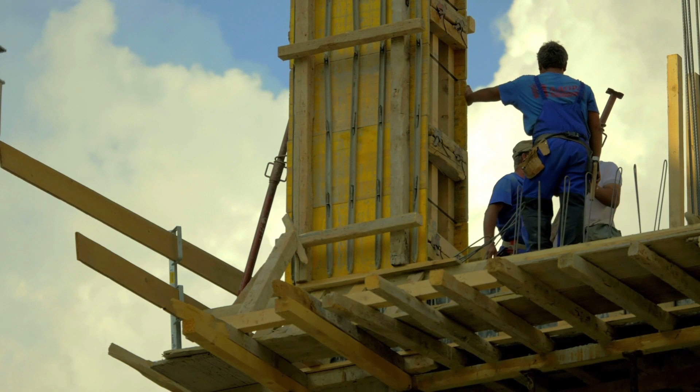As I am from the civil engineering field, I am going to elaborate here about civil engineering subjects at the beginning. Among the many subjects of civil engineering, I have first chosen to explain building materials. In this subject, you are going to know about the principal properties of building materials. This is episode number 1 of building materials, covering principal properties of building materials. Let's start without wasting much time. Building materials.

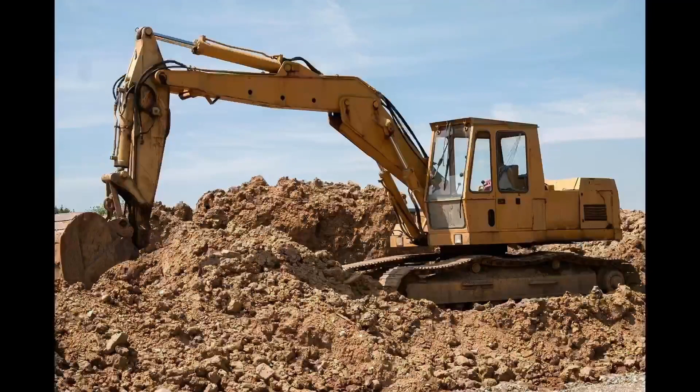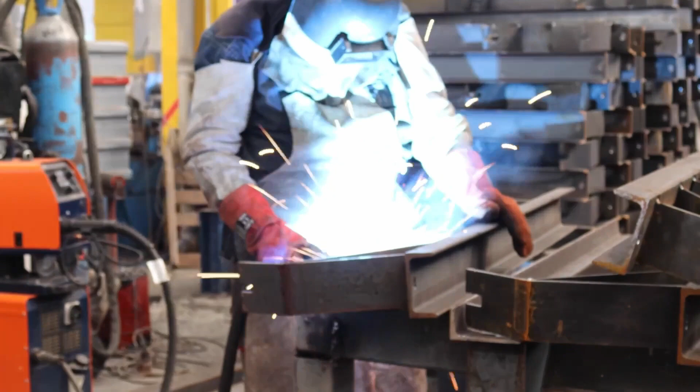As we know, construction materials play a very important role in this modern era. Although the most important use of building material is in construction activities, no field of engineering can be imagined without their use. Also, the building materials industry is a very important contributor to our national economy, as its production controls both the rate and quality of construction work.

There are some general factors that affect the choice of materials for a particular project. Perhaps the most important factor is the weather background. Obviously, climate change has led to the development of different materials, and another important aspect is the economic aspect of material selection.

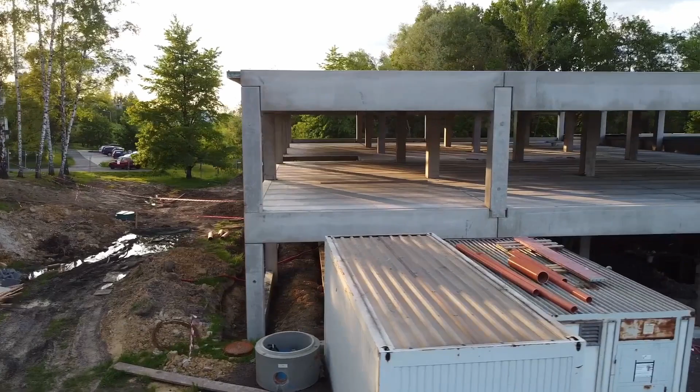Due to the great variety of uses of buildings and installations and various production processes, building materials require a wide range of properties. Specific properties of building materials serve as a basis for dividing them into separate groups. The main properties of construction materials predetermine their applications. Only a comprehensive knowledge of material properties allows rational selection of materials for specific service conditions.

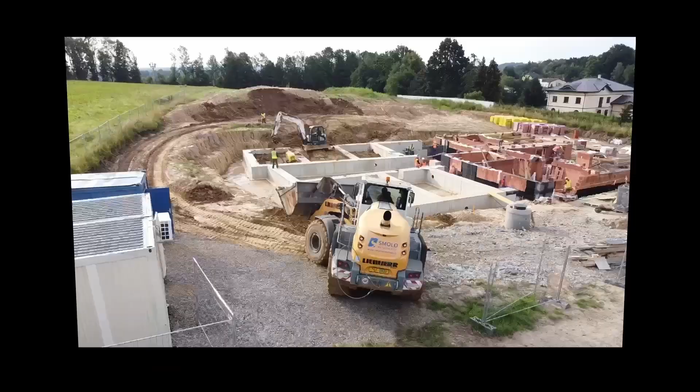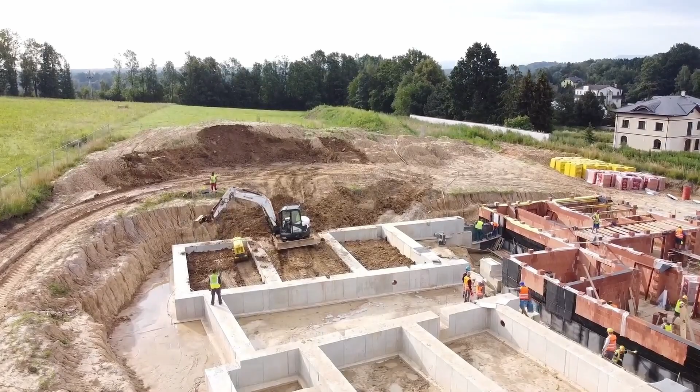In order to develop products of greater economic efficiency, it is important to compare the performance of similar materials under specific service conditions. Additional cost can be reduced by improving the quality of construction materials and products. So economists in the construction industry must have a good working knowledge of: first, building materials; second, their optimal applications based on their main properties; and third, their production techniques, so that buildings and installations can have optimal engineering, economic performance and efficiency.

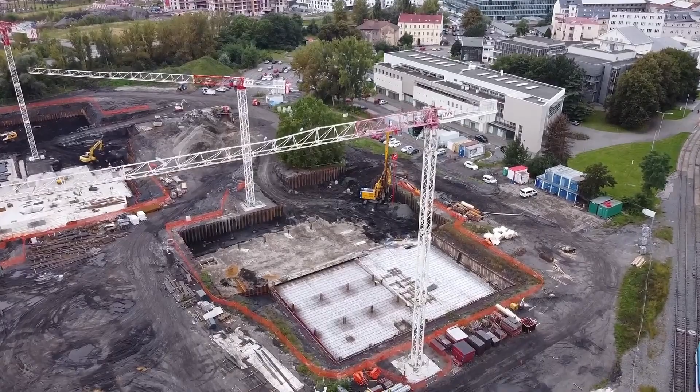After acquiring sufficient knowledge, an economist specializing in the field of construction becomes an active participant in the development of the construction industry and the production of construction materials.

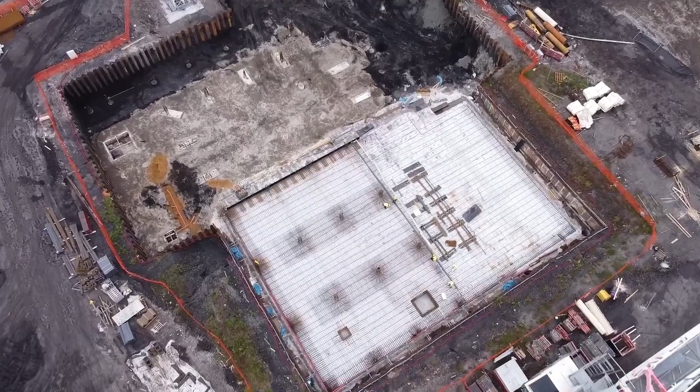As we saw why we need to know about the main properties of construction materials, let's see them one by one. I have categorized many properties as physical properties, mechanical properties, chemical properties, electrical properties, magnetic properties, and thermal properties. Let's discuss physical properties of building materials one by one.

Density - you've all heard this many times. Simply, it's the ratio of mass of the material to its volume in a homogeneous state, where homogeneous means the material excludes pores and voids. Almost all the physical properties of materials are influenced by its density value. It is denoted by rho and measured in grams per cubic centimeter, where mass is in grams and volume is in cubic centimeters. Now remember some basic densities of important building materials as follows.

Wood has a density of about 1.5 to 1.6 grams per cubic centimeter. Brick has a density of about 2.5 to 2.8 grams per cubic centimeter. Granite has a density of about 2.6 to 2.9 grams per cubic centimeter. Portland cement has a density of about 2.9 to 3.1 grams per cubic centimeter, and steel has a density of about 7.8 to 7.9 grams per cubic centimeter.

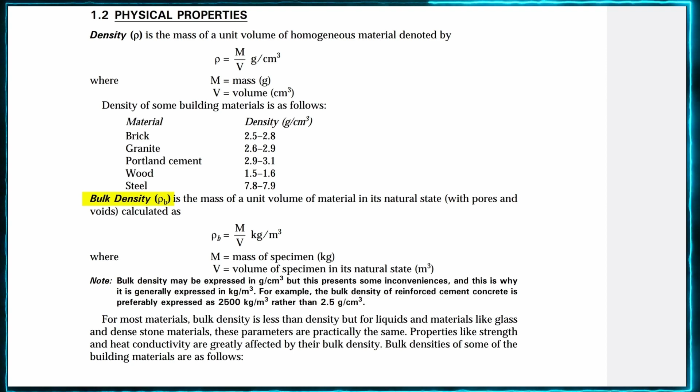Natural materials include pores and voids. Bulk density influences the mechanical properties of materials like strength and heat conductivity. It is denoted by rho subscript small b and measured in kilogram per cubic meter, where mass is in kilograms.

Volume is in cubic meters. For most materials, bulk density is less than density, but for liquids and materials like glass and dense stone, density and bulk density are practically the same. Properties like strength and heat conductivity are greatly affected by bulk density.

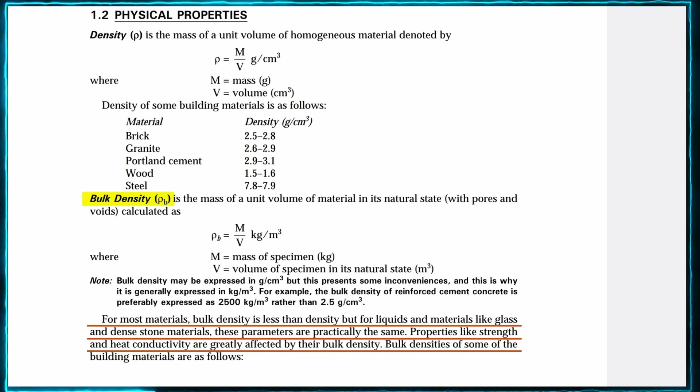Remember some basic bulk densities of important building materials. Pine wood has bulk density about 500 to 600 kg per cubic meter. Brick has bulk density about 1600 to 1800 kg per cubic meter. Sand has bulk density about 1450 to 1650 kg per cubic meter. Granite has bulk density about 2500 to 2700 kg per cubic meter, and steel has bulk density about 7850 kg per cubic meter.

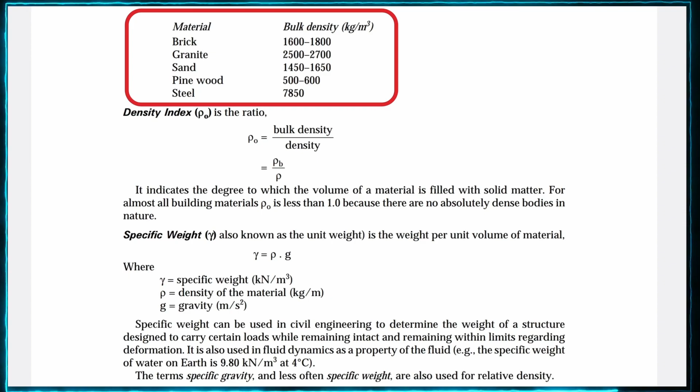Next is the density index. Density index is the ratio of bulk density and density. It is denoted by rho subscript 0. It indicates the degree to which the volume of a material is filled with solid matter. For almost all building materials, density index is less than 1, because there are no absolutely dense bodies available in nature.

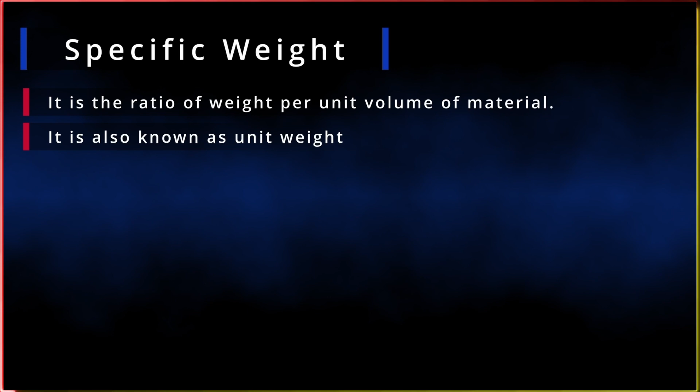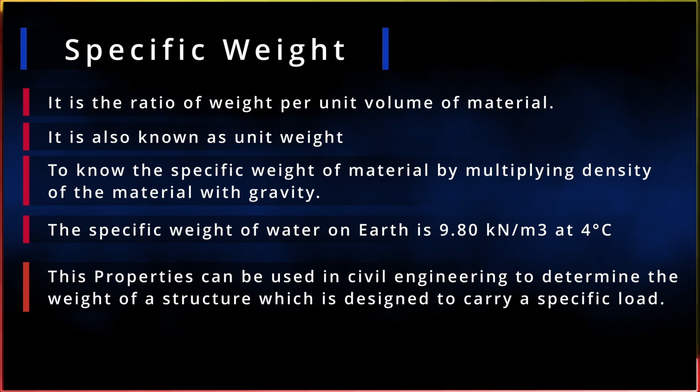Next is the specific weight. It is the ratio of weight per unit volume of material. It is denoted by gamma, and is also known as unit weight. To know the specific weight of a material, multiply the density of the material by gravity. The specific weight of water on earth is 9.80 kN per meter cube at 4 degrees Celsius. These properties can be used in civil engineering to determine the weight of a structure which is designed to carry a specific load.

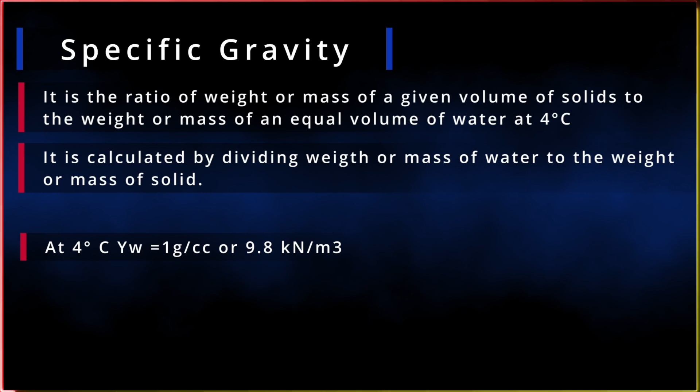Next is the specific gravity. It is the ratio of weight or mass of a given volume of solid to the weight or mass of an equal volume of water at 4 degrees Celsius. It is denoted by G suffix S. It is calculated by dividing weight or mass of solid by weight or mass of water. At 4 degrees Celsius, unit weight of water is equal to 1 gram per centimeter cube, or 9.8 kilonewton per meter cube.

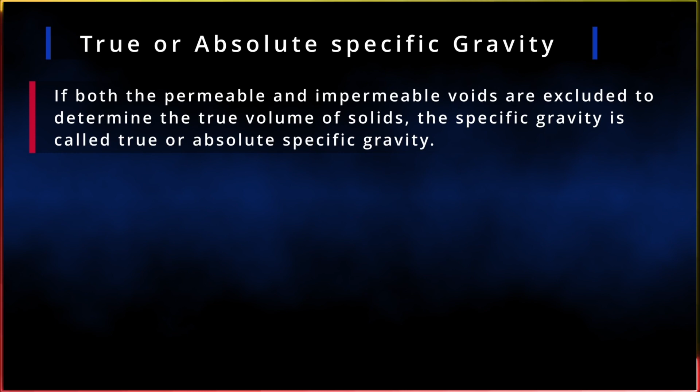Next is true or absolute specific gravity. If both the permeable and impermeable voids are excluded to determine the true volume of solid, the specific gravity is called true or absolute specific gravity.

Next is apparent specific gravity. If both the permeable and impermeable voids are included to determine the true volume of solids, the specific gravity is called apparent specific gravity. It is the ratio of mass density of fine-grained material to the mass density of water.

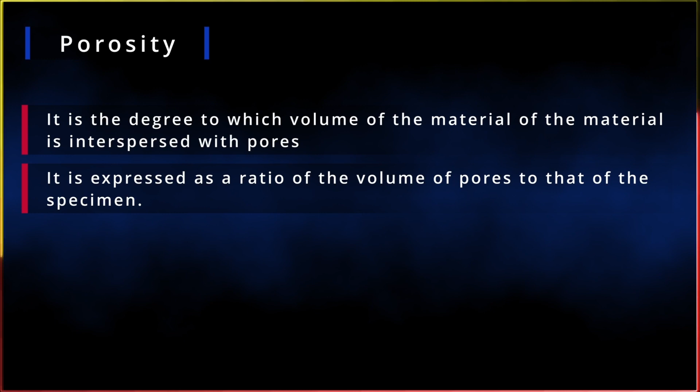Next is the porosity. It is the degree to which the volume of the material is interspersed with pores, expressed as a ratio of the volume of pores to that of the specimen. Porosity indicates other major properties of material such as bulk density, heat conductivity, and durability. Dense materials with low porosity are used for constructions requiring high mechanical strength, while walls of buildings are commonly built of materials featuring considerable porosity.

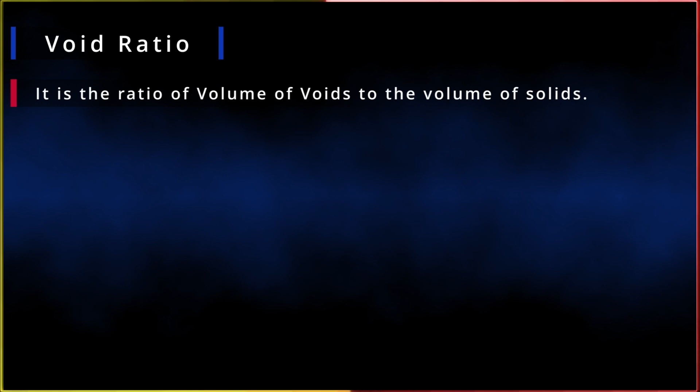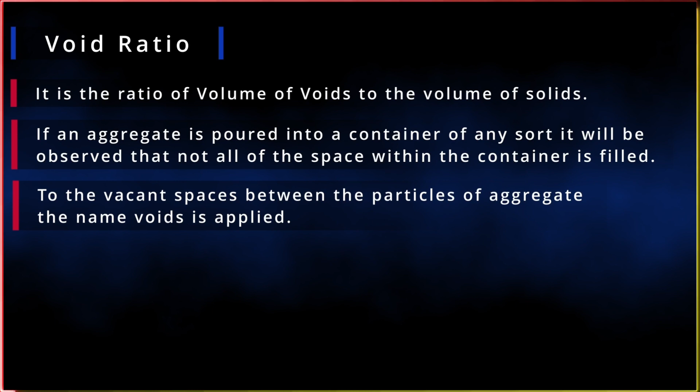Next is the void ratio. It is the ratio of volume of voids to the volume of solid. If an aggregate is poured into a container of any sort, it will be observed that not all of the space within the container is filled. The vacant space between the particles of aggregate is called voids.

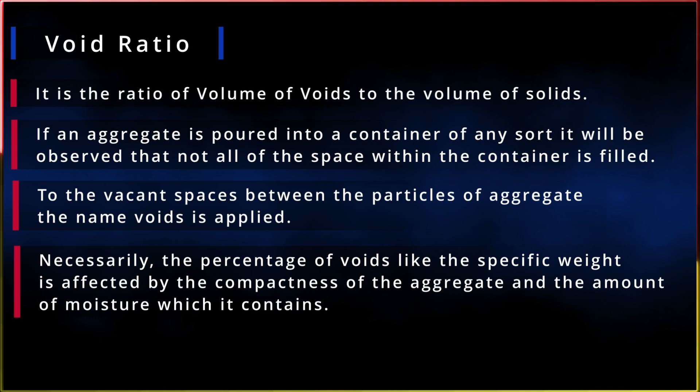The percentage of voids, like the specific weight, is affected by the compactness of the aggregate and the amount of moisture it contains. Generally, void determinations are made on material measured loose. There are two classes of methods commonly employed for measuring voids: direct and indirect methods.

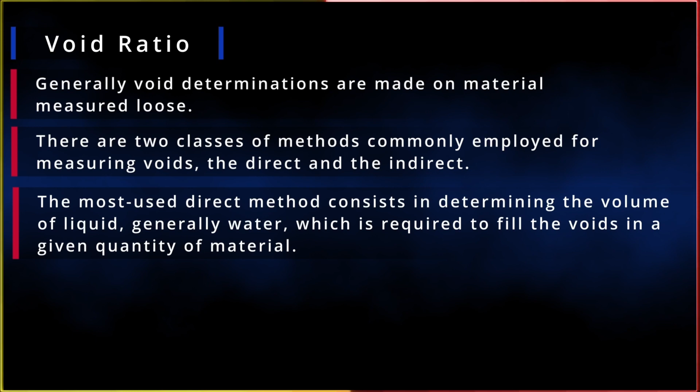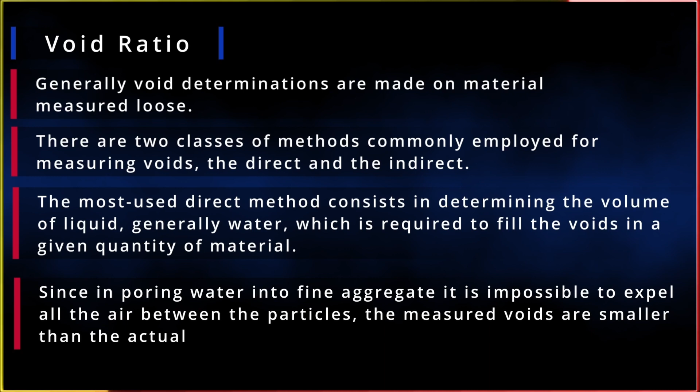The most used direct methods consist of determining the volume of liquid, generally water, required to fill the voids in a given quantity of material. Since pouring water into fine aggregate makes it impossible to expel all the air between the particles, the measured voids are smaller than the actual voids. Therefore, direct methods should not be used with fine aggregate unless the test is conducted in a vacuum.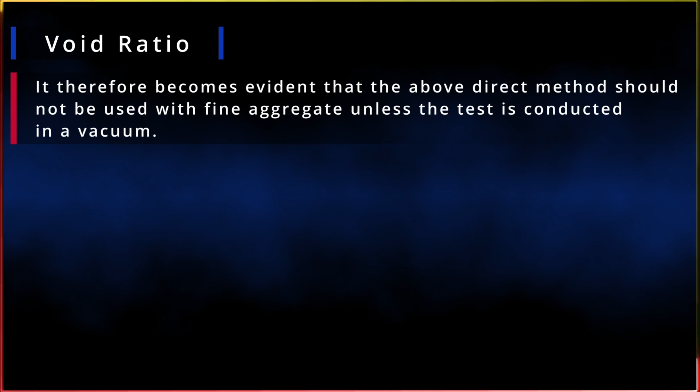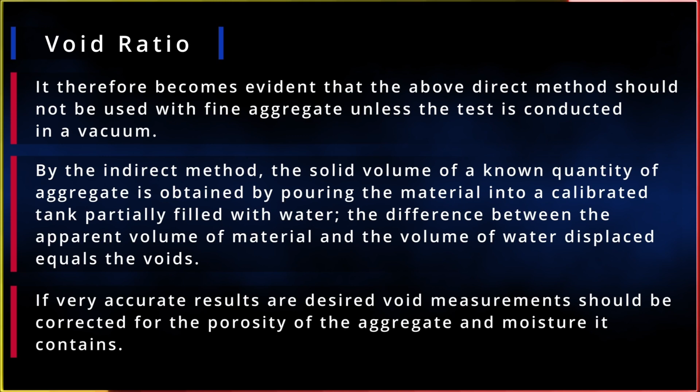By the indirect method, the solid volume of a known quantity of aggregate is obtained by pouring the material into a calibrated tank partially filled with water. The difference between the apparent volume of material and the volume of water displaced equals the voids. If very accurate results are desired, void measurement should be corrected for the porosity of the aggregate and the moisture it contains.

Next is hygroscopicity. It is the property of a material to absorb water vapor from air. It is influenced by air temperature and relative humidity, types of pores, number and size of pores, and by the nature of the substance involved.

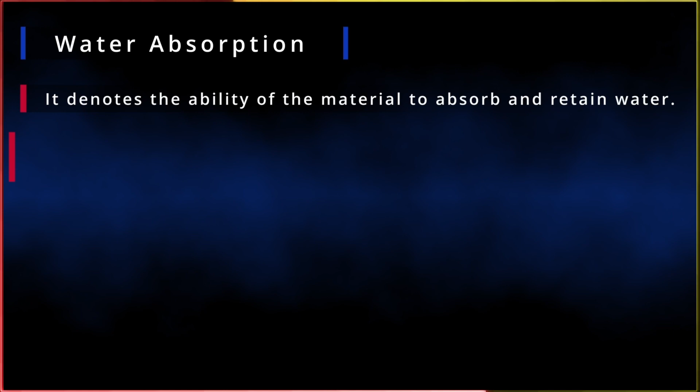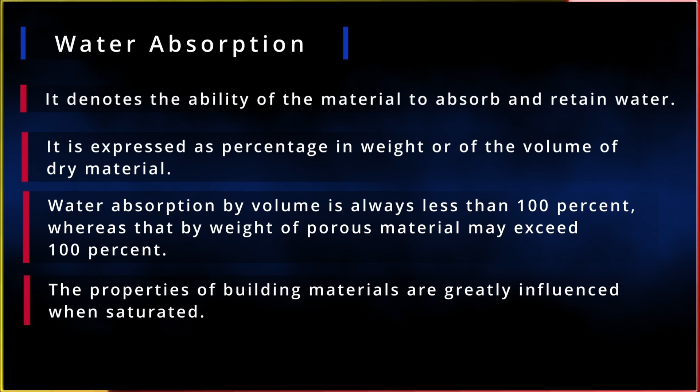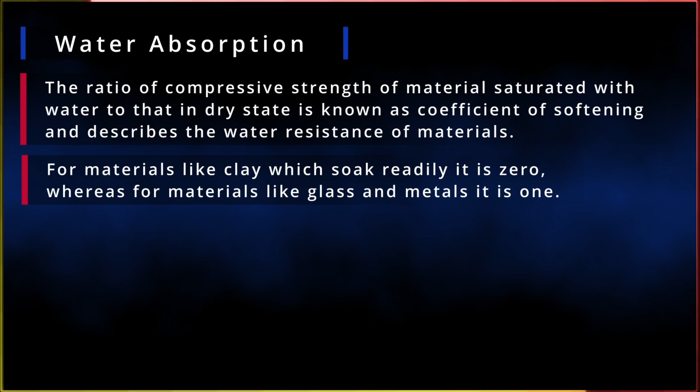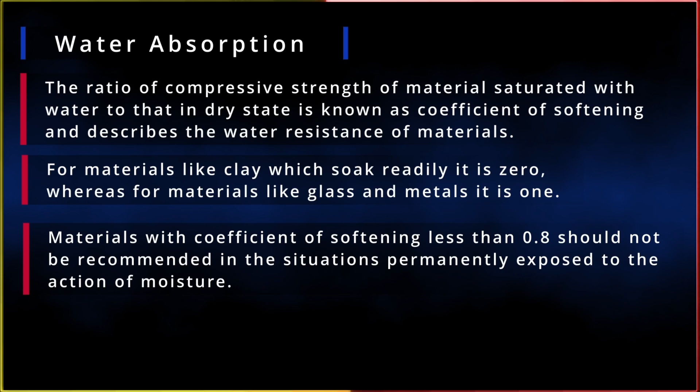Next is water absorption. It is the ability of material to absorb and retain water, expressed as a percentage in weight or volume of dry material. Water absorption by volume is always less than 100%, whereas by weight of porous material it may exceed 100%. The properties of building materials are greatly influenced when saturated. The ratio of compressive strength of saturated material to that in dry state is known as the coefficient of softening, which describes the water resistance of material. Coefficient of softening is 0 for materials like clay which soak readily, whereas for materials like glass and metals it is 1. Materials with coefficient of softening less than 0.8 should not be recommended where permanently exposed to moisture.

Next is weathering resistance. It is the ability of material to endure alternate wet and dry conditions for a long time without considerable deformation and loss of mechanical strength.

Next is water permeability. It is the capacity of a material to allow water to penetrate under pressure. Materials like glass, steel, and bitumens are impervious.

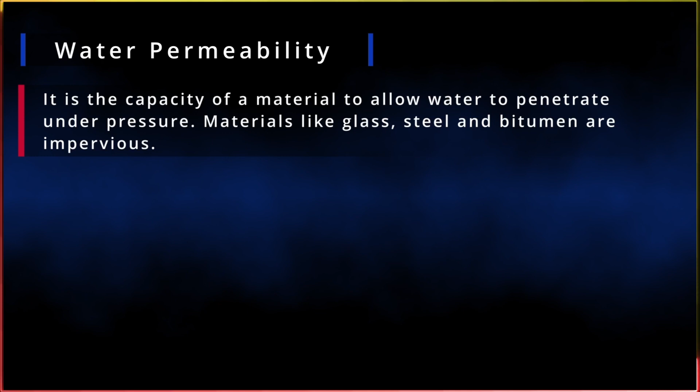Next is frost resistance. It denotes the ability of water saturated materials to endure repeated freezing and thawing without considerable decrease of mechanical strength. Under such conditions, the water contained by the pores increases in volume even up to 9% on freezing. Thus, the walls of the pores experience considerable stresses and may even fail.

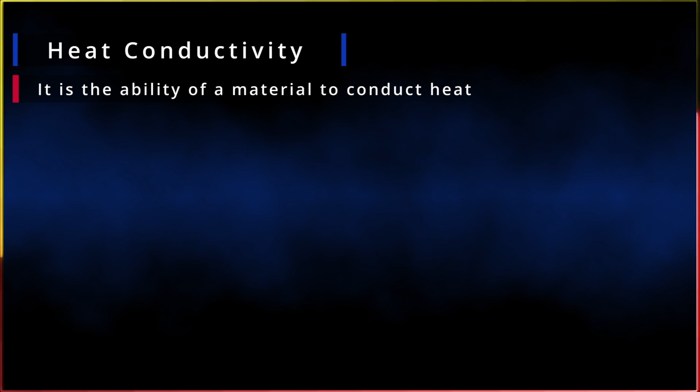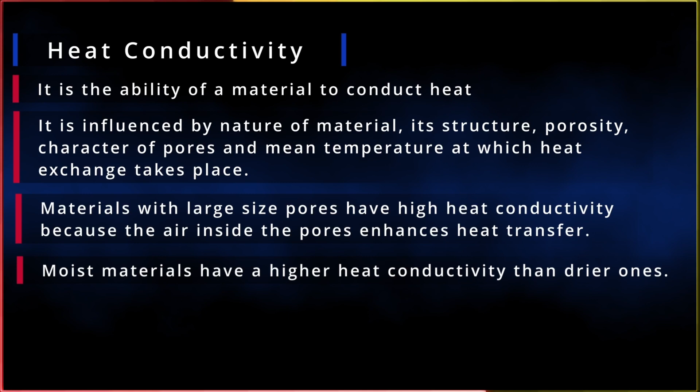Next is heat conductivity. It is the ability of a material to conduct heat, influenced by the nature of material, its structure, porosity, character of pores, and mean temperature at which heat exchange takes place. Materials with large size pores have high heat conductivity because the air inside the pores enhances heat transfer. Moist materials have higher heat conductivity than dried ones. This property is of major concern for materials used in walls of heated buildings since it will affect dwelling houses.

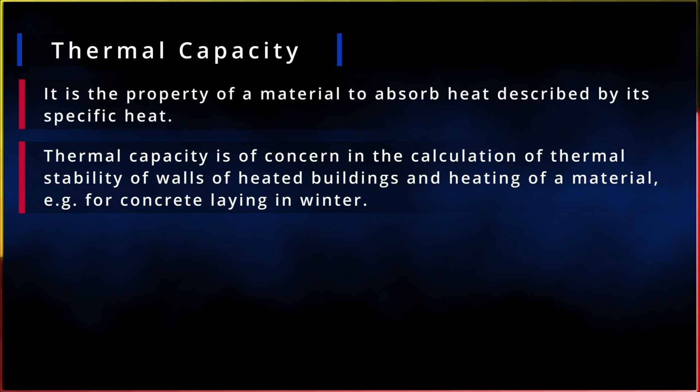Next is thermal capacity. It is the property of a material to absorb heat, described by its specific heat. Thermal capacity is of concern in calculating thermal stability of walls of heated buildings and heating of materials, for example concrete laying in winters.

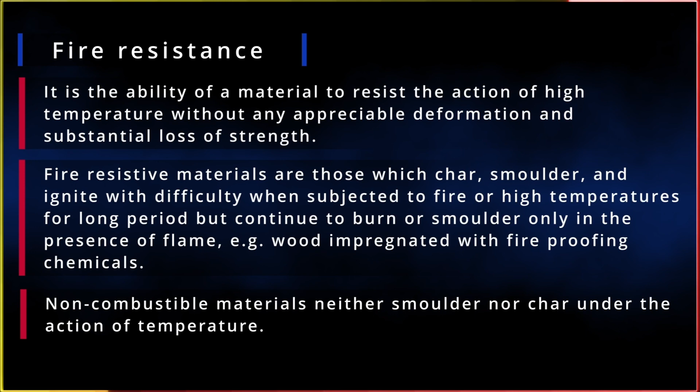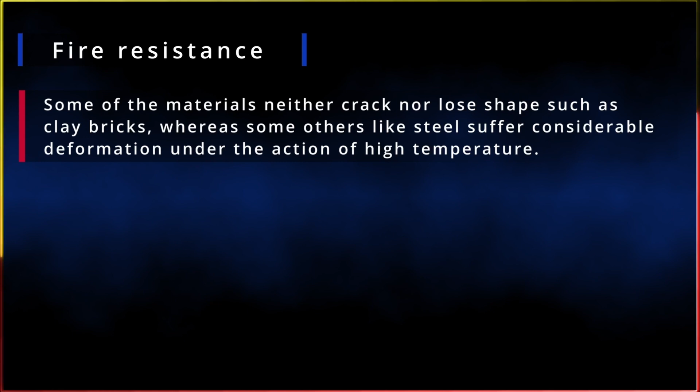Next property is fire resistance. It is the ability of a material to resist the action of high temperature without appreciable deformation and substantial loss of strength. Fire resistant materials are those which char, smolder, and ignite with difficulty when subjected to fire or high temperature for a long period, but continue to burn or smolder only in the presence of flame, for example wood impregnated with fireproofing chemicals. Non-combustible materials neither smolder nor char under the action of temperature. Some materials neither crack nor lose shape, such as clay bricks, whereas others like steel suffer considerable deformation under high temperature.

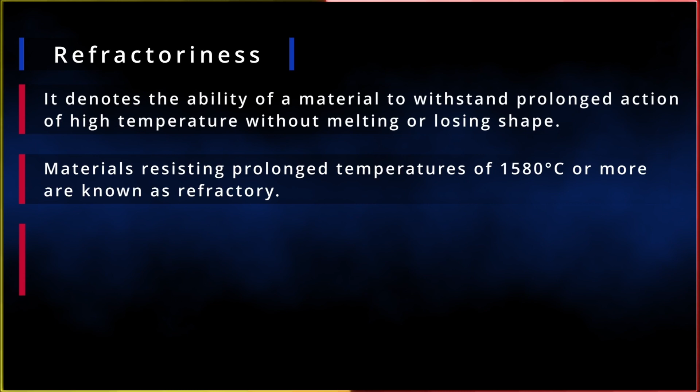Next property is refractoriness. It denotes the ability of a material to withstand prolonged action of high temperature without melting or losing its shape. Materials resisting prolonged temperature of 1580 degrees Celsius or more are known as refractory materials. High melting materials can withstand temperature from 1350 to 1580 degrees Celsius, whereas low melting materials withstand temperature below 1350 degrees Celsius.

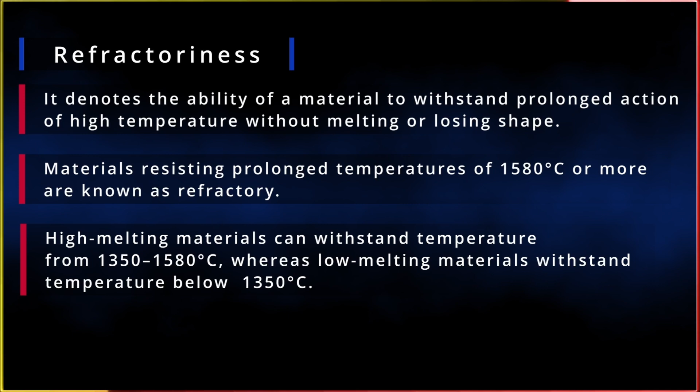Next property is durability. It is the ability of a material to resist the combined effect of atmospheric actions and other related factors. Next property is spalling resistance.

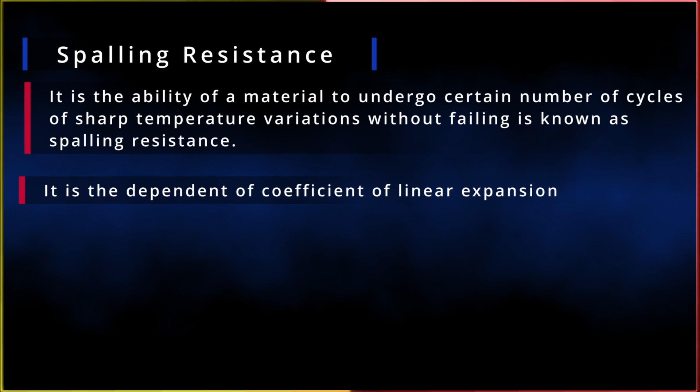It is the ability of a material to undergo a certain number of cycles of sharp temperature variations without failing, known as spalling resistance. It is dependent on the coefficient of linear expansion.

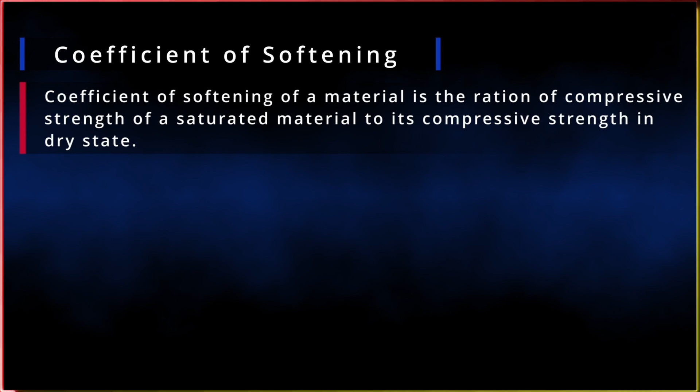Now we have the last physical property, coefficient of softening. The coefficient of softening of a material is the ratio of compressive strength of saturated material to its compressive strength in dry state. It affects the strength of water absorbent materials like soil.

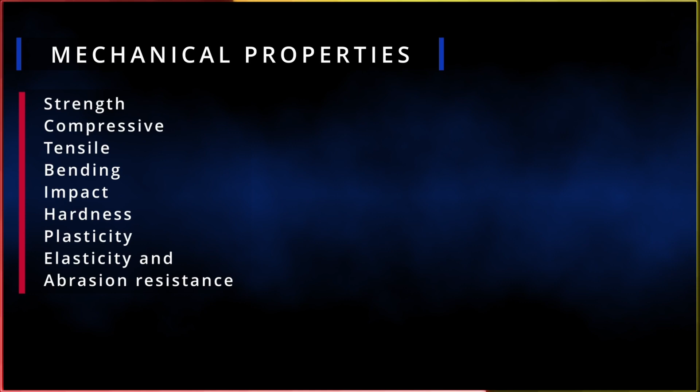Now you are going to know mechanical properties. The important mechanical properties considered for building materials are strength, compression, tension, bending, impact, hardness, plasticity, elasticity, and abrasion resistance.

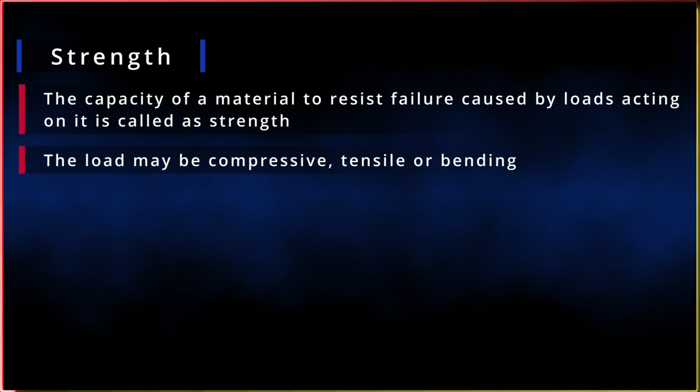The first property is strength. The capacity of a material to resist failure caused by loads acting on it is defined as strength. The load may be compressive, tensile, or bending. It is determined by dividing the ultimate load taken by the material with its cross-section area.

Strength is an important property for any construction materials. So, to provide maximum safety in strength, a factor of safety is provided for materials, and it is selected depending on the nature of work, quality of materials, economic conditions, etc.

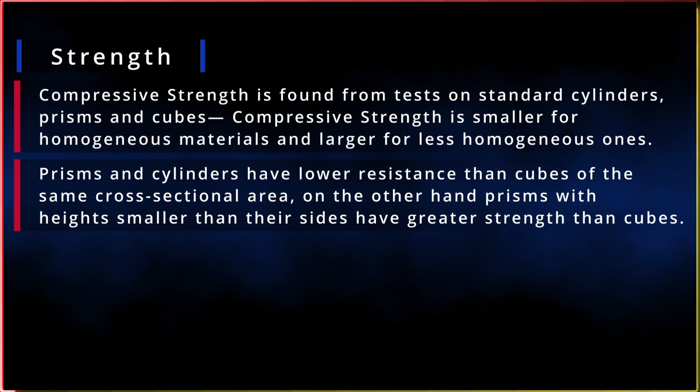Compressive strength is found from tests on standard cylinders, prisms, and cubes. Compressive strength is smaller for homogeneous materials and larger for less homogeneous materials. For the same cross-sectional area, prisms and cylinders have lower resistance than cubes.

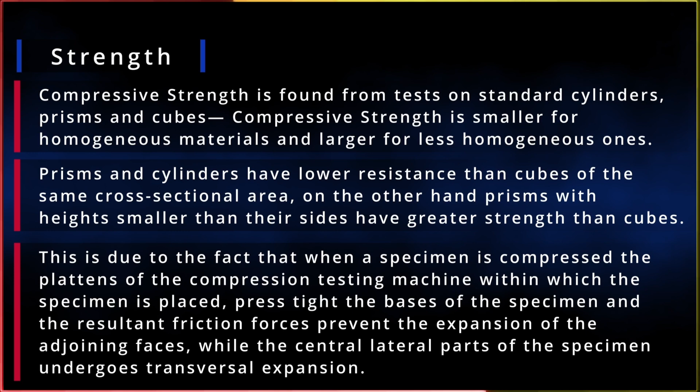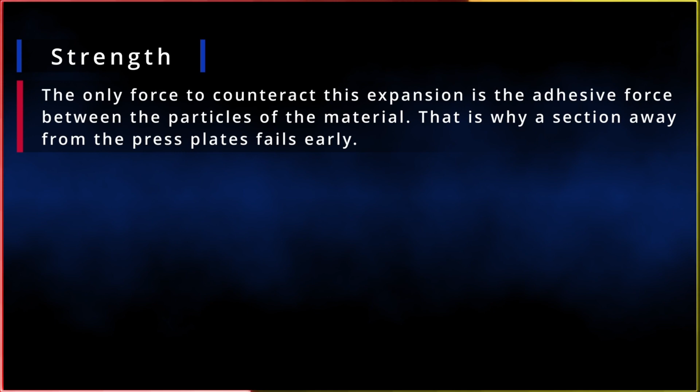On the other hand, prisms with heights smaller than their sides have greater strength than cubes. This is because when a specimen is compressed by the platens of the compression testing machine, it presses tightly on the bases of the specimen, and the resultant friction forces prevent the expansion of the adjoining faces, while the central lateral parts undergo transversal expansion. The only force to counteract this expansion is the adhesive force between the particles of the material. That is why a section away from the pressing plates fails early.

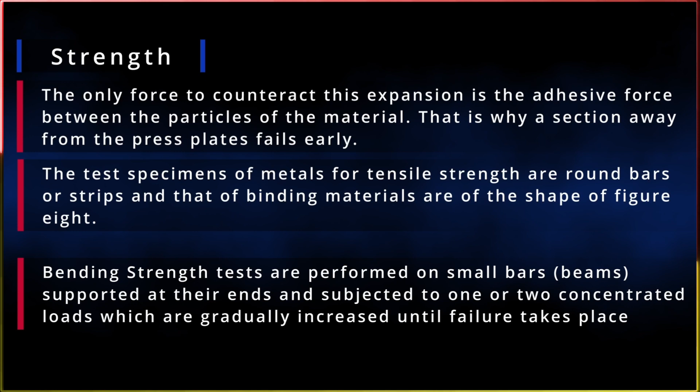The test specimens of metals for tensile strength are round bars or strips, and those of binding materials are shaped like a figure 8. Bending strength tests are performed on small bars or beams, supported at their ends and subject to one or two concentrated loads, which are gradually increased until failure takes place.

Next property is hardness. Hardness is the ability of a material to resist penetration or scratching by a harder body. The Mohs scale is used to determine the hardness of materials. Hardness is most important to decide the uses of a particular aggregate, and it also influences workability. Hardness of metals and plastics is found by indentation with a steel ball.

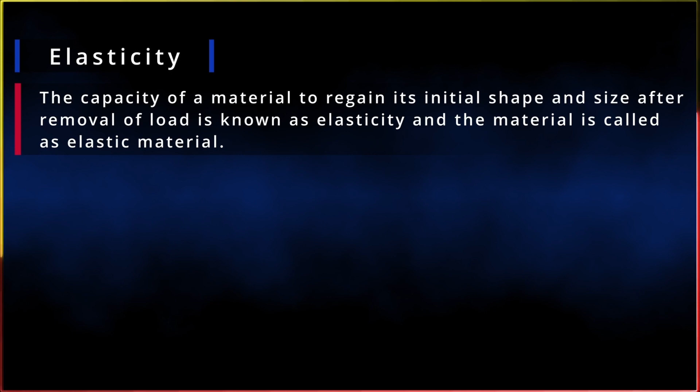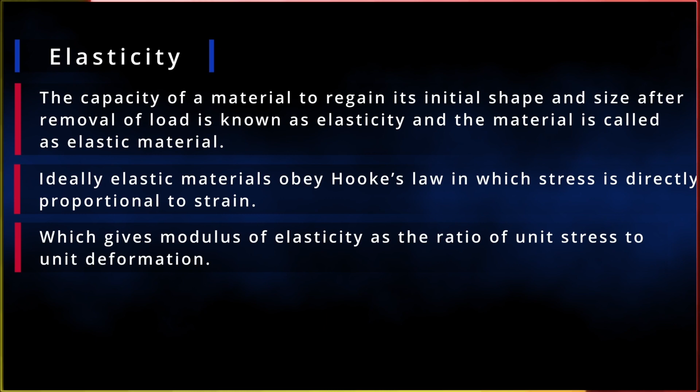Next is elasticity. The capacity of a material to regain its initial shape and size after removal of load is known as elasticity, and the material is called an elastic material. Ideally, elastic materials obey Hooke's law, in which stress is directly proportional to strain, which gives the modulus of elasticity as the ratio of unit stress to unit deformation. The higher the value of the modulus of elasticity, the lower the deformations will be. Within the limits of elasticity of solid bodies, the deformation is proportional to the stress.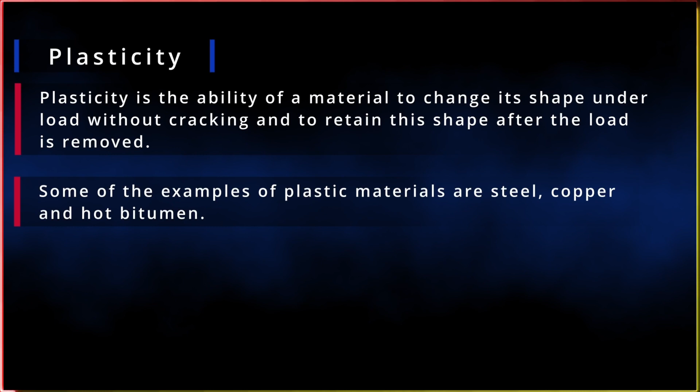Next mechanical property is plasticity. Plasticity is the ability of a material to change its shape under a load without cracking and to retain this shape after the load is removed. Some examples of plastic materials are steel, copper, and hot bitumen.

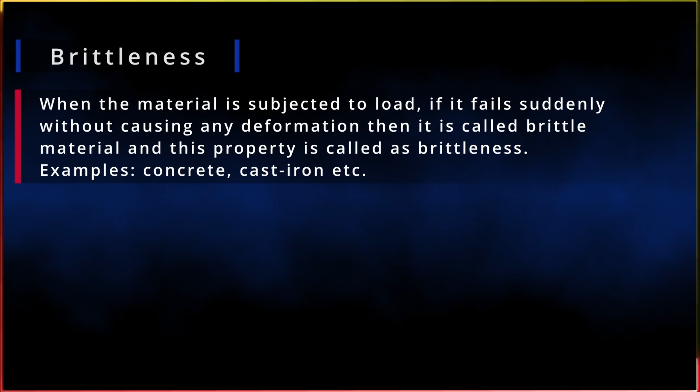Next is brittleness. When a material is subjected to load, if it fails suddenly without causing or showing any deformation, then it is called a brittle material, and this property is called brittleness. For example, concrete and cast iron are brittle materials.

Next property is fatigue. If a material is subjected to repeated loads, then failure occurs at some point which is lower than the failure point caused by steady loads. This behavior is known as fatigue.

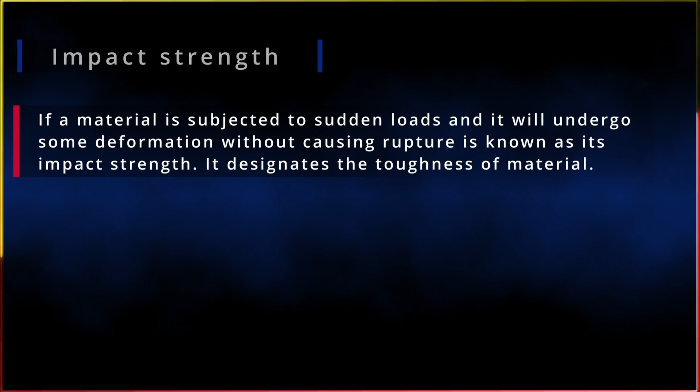Impact strength: if a material is subjected to sudden loads and undergoes some deformation without causing rupture, this is known as its impact strength. This property defines the toughness of the material.

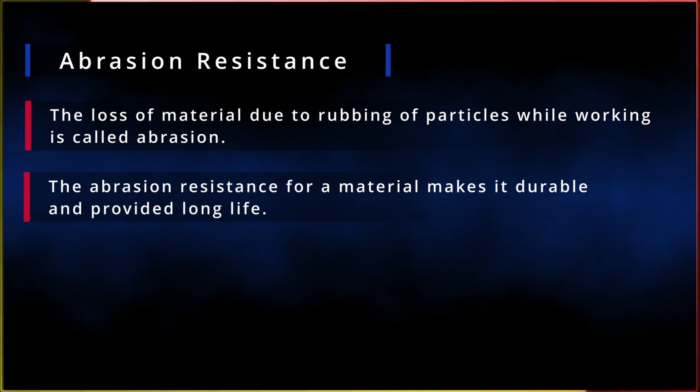Next is abrasion resistance. The loss of material due to rubbing of particles while working is called abrasion. The abrasion resistance of a material makes it durable and provides long life.

The last mechanical property is creep. Creep is the deformation caused by constant loads over a long period or long time. It is time dependent and occurs at a very slow rate. It is almost negligible in normal conditions, but at high temperature conditions, creep occurs rapidly.

Our next property is based on chemical resistance. The properties of materials against chemical actions or chemical combinations are termed chemical properties, and they are chemical resistance and corrosion resistance.

Chemical resistance is the ability of a construction material to resist the effects of chemicals like acids, salts and alkalis. Underground installations, constructions near sea, etc. should be built with materials having great chemical resistance.

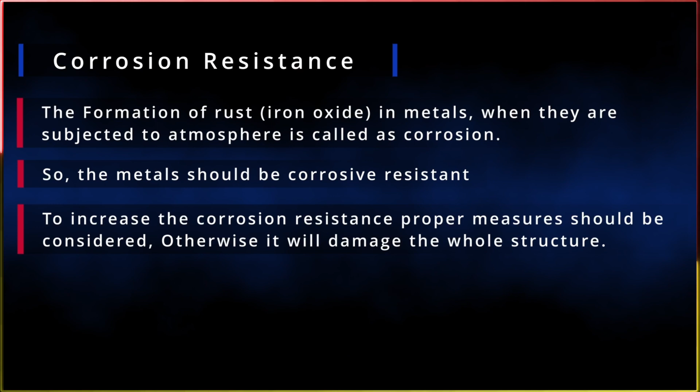Next is corrosion resistance, based on chemical resistance. The formation of rust, that is iron oxide, in metals when subjected to atmosphere is called corrosion. Metals should be corrosion resistant. To increase corrosion resistance, proper measures should be considered, otherwise it will damage the whole structure.

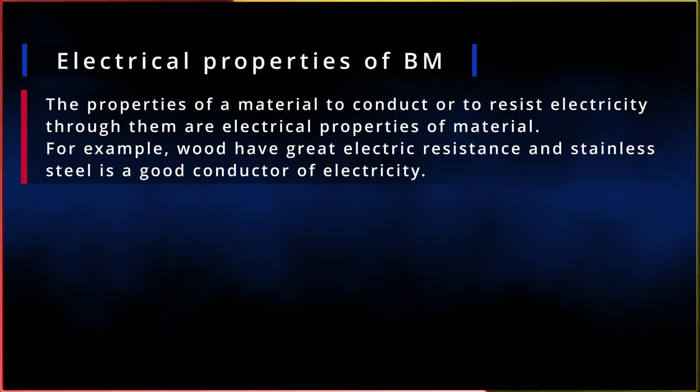Next property is the electrical properties of building materials. The property of a material to conduct or resist electricity through them is called electrical properties of materials. For example, wood has great electric resistance, and stainless steel is a good conductor of electricity.

Next is the magnetic properties of building materials. Magnetic properties of materials like permeability, hysteresis, etc. are required in the case of generators. Iron is a magnetic material and aluminum is a non-magnetic material.

Next is the thermal properties of building materials. It includes properties like thermal capacity, thermal conductivity, thermal resistivity and specific heat. Thermal capacity is the property of a material to absorb heat, and it is required to design proper ventilation. It influences the thermal stability of walls. It is expressed in joule per Newton degree Celsius and calculated by this formula,

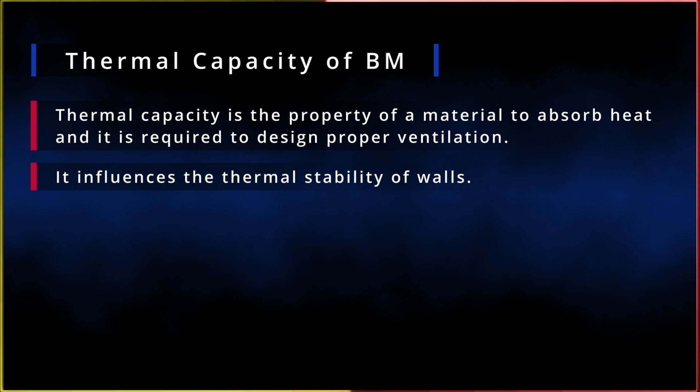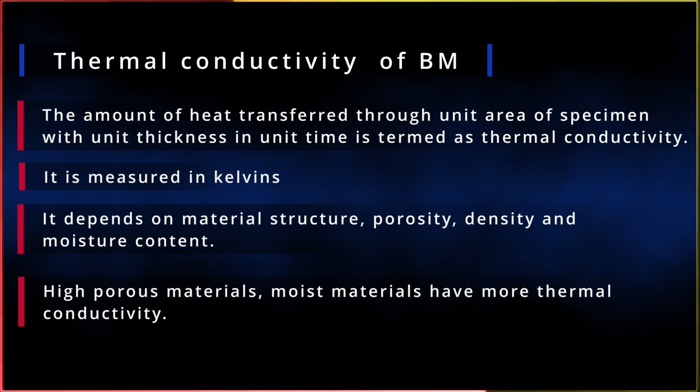Thermal conductivity depends on material structure, porosity, density and moisture content. High porous materials as well as moist materials have more thermal conductivity.

Next is thermal resistivity. It is the ability to resist heat conduction, and it is the reciprocal of thermal conductivity. When multiplied by the thickness of material, it gives thermal resistance. Thermal resistivity of soil varies from 30 to 500 degree Celsius centimeter per watt.

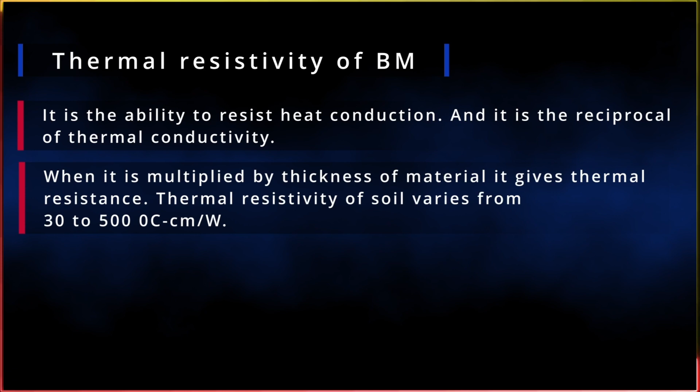When it is multiplied by thickness of material, it gives thermal resistance. Thermal resistivity of soil varies from 30 to 500 degrees Celsius centimeter per watt.

Next property is specific heat. Specific heat is the quantity of heat required to heat 1 Newton of material by 1 degree Celsius. Specific heat is useful when we use the material in high temperature areas.

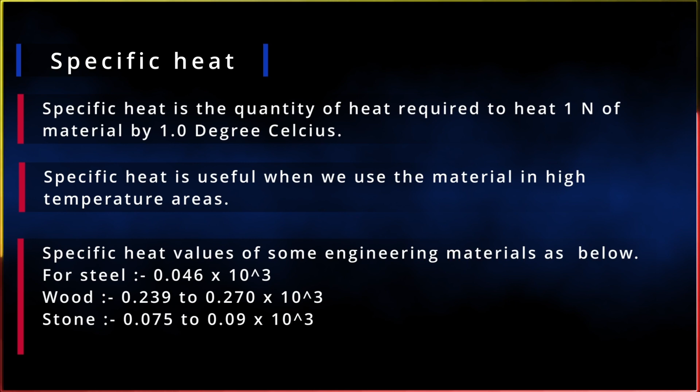Specific heat values of some engineering materials are as follows: for steel, it is 0.046 into 10 raised to the power 3. For wood, it is 0.239 to 0.270 into 10 raised to the power 3. And for stone, it is 0.075 to 0.09 into 10 raised to the power 3.

The last part of this episode is the characteristic behavior under stress. Building materials under stress include ductility, brittleness, stiffness, flexibility, toughness, malleability, and hardness.

Everyone must remember the points I am going to tell you. Examiners make many questions about these properties. Yes, I have seen this in many question papers, which is why I am telling you to remember these points.

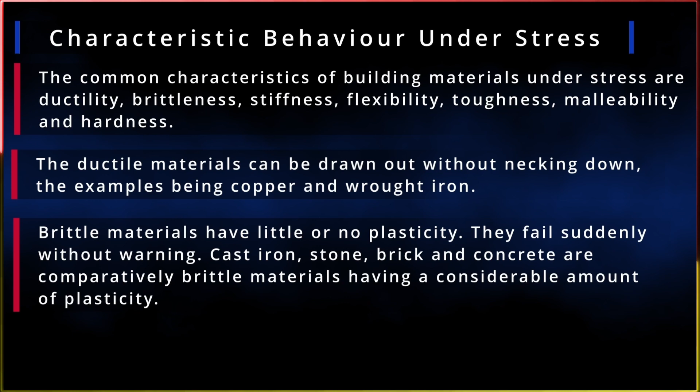Ductile materials can be drawn out without necking down, examples being copper and wrought iron. Brittle materials have little or no plasticity; they fail suddenly without warning. Cast iron, stone, brick, and concrete are comparatively brittle materials, having a considerable amount of plasticity.

Stiff materials have a high modulus of elasticity, permitting small deformation for a given load. Flexible materials, on the other hand, have low modulus of elasticity and bend considerably without breaking down.

Tough materials withstand heavy shocks; toughness depends upon strength and flexibility. Malleable materials can be hammered into sheets without rupture; this depends upon ductility and softness of materials. Copper is the most malleable material.

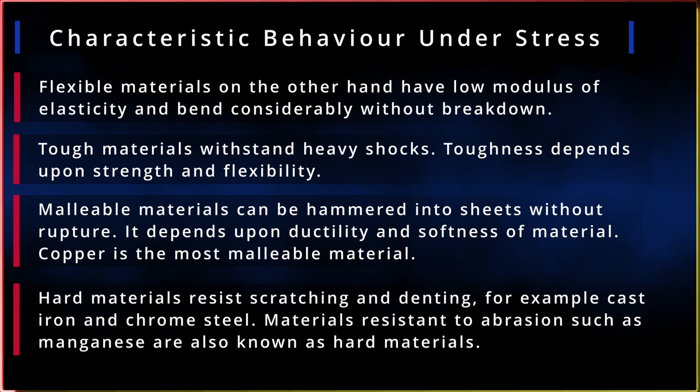Hard materials resist scratching and denting, for example cast iron and chrome steel. Materials resistant to abrasion, such as manganese, are also known as hard materials.